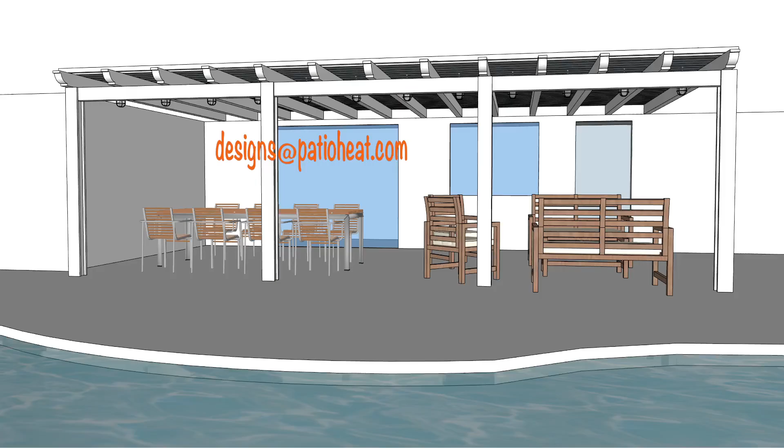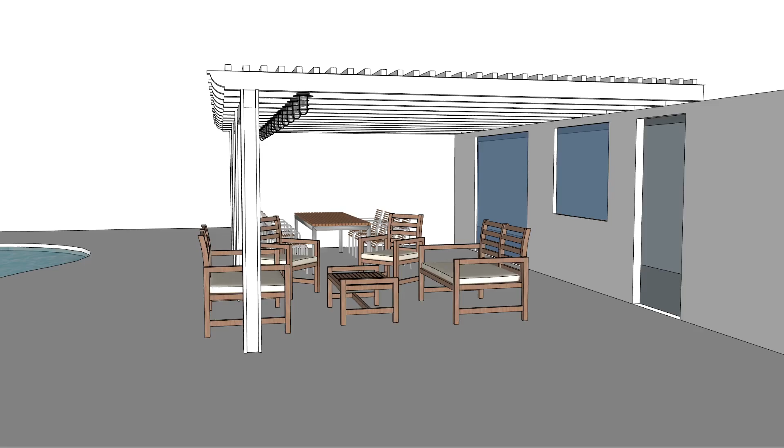All right, so let's go ahead and take a look at this covered patio area here. I'm going to go first into the overall dimensions that I have here. So the overall dimensions I have from the outside edge of this post to the structure over here, I have at 15 foot 1 inch.

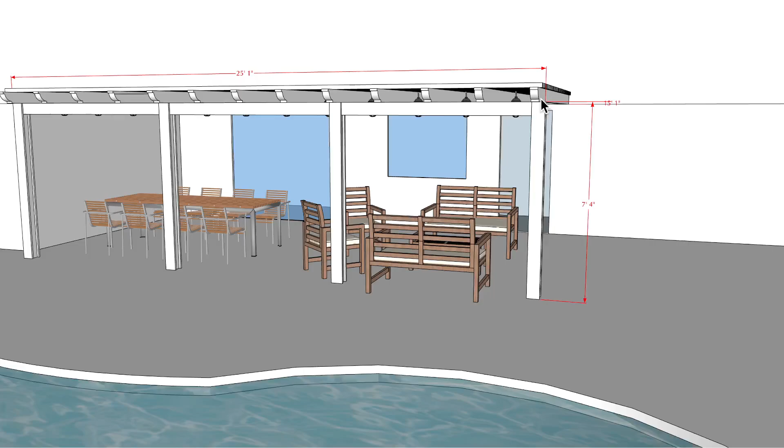And then from this distance over here, from the post to the post over here, I have at 25 foot 1. And then I have a height of the bottom of these beams going across here. I have a total bottom height of that at 7 feet 4 inches off the finished floor. You can see there's some light fixtures.

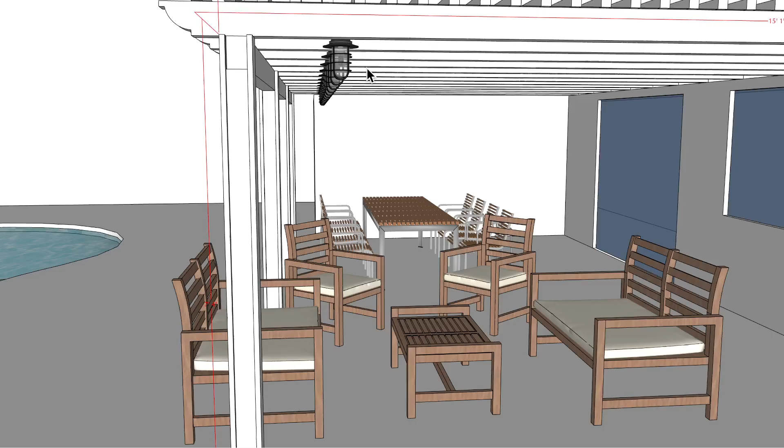These may have to be moved. I'm not exactly sure where they are, specifically as far as how far back and what position they are, but in any case, I just want to let you know that I do see them, and that that might be something that we have to be concerned about. Go ahead and turn off those dimensions for right now, and then I believe I got some information about the distance between these beams right here.

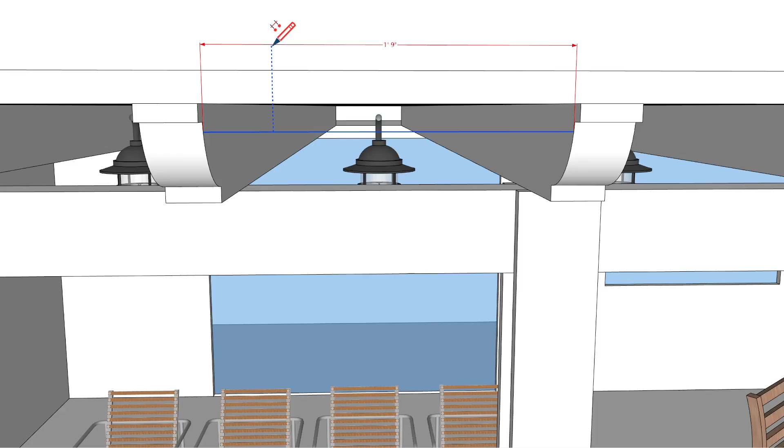So you can see here I have that at 1 foot 9 inches, and so that's from the inside edge to the inside edge. Go ahead and turn that off, and then I think that's pretty much about it.

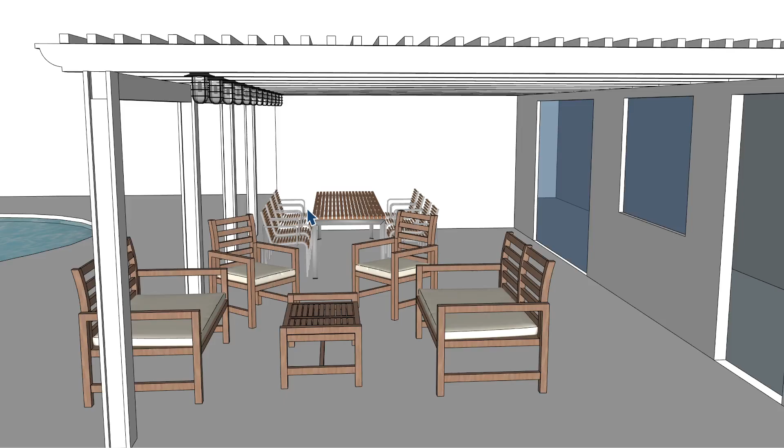Now, looking at the images that I received, it kind of appeared as if the seating positions are pushed off a little bit to the left here, or the outside edge of the patio deck, and I'm only assuming that because of the fact that there is a doorway over here, a sliding door over here, and that's an entry exit point. So I'm assuming that that's not somewhere that you're going to put the seating positions in.

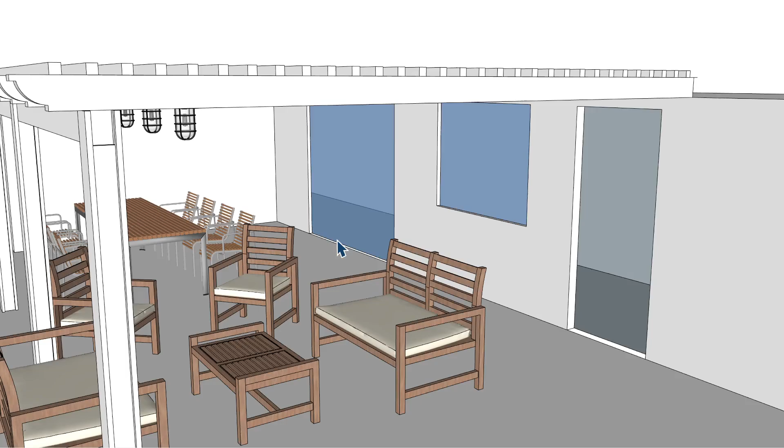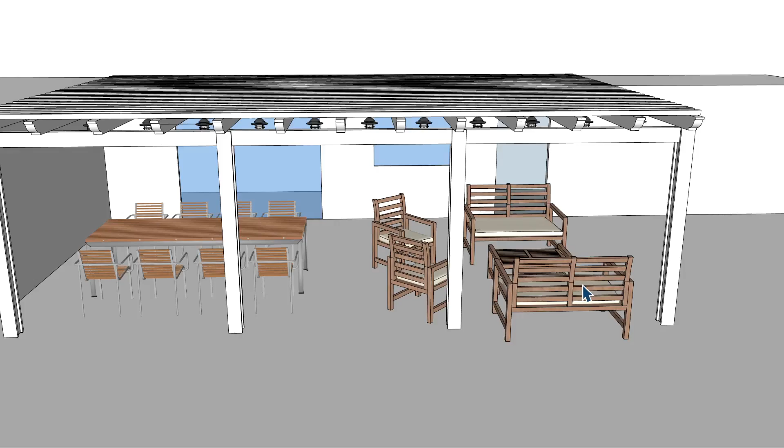Not sure if this door comes out or is pushed in, but let's just go ahead and take note that there is a door over here. That's about it as far as the positions concerned that I see. I'm not quite sure of how many chairs are over here and how far out it goes, but this is kind of what I'm just showing for this particular application.

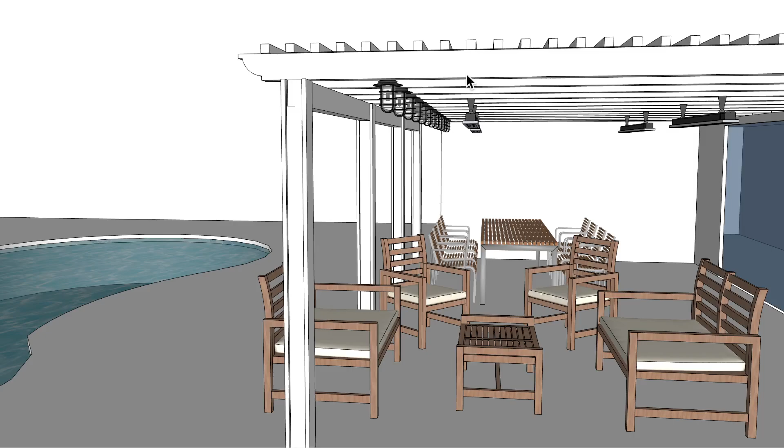All right, so first of all, let's go ahead and look at what models we might put in here. These are slimline units, and the slimline units I have, these are 3,000 watt units. I have them placed at the bottom edge of this beam here and pointed straight down. And then as far as the position's concerned, let's go ahead and draw up that distance.

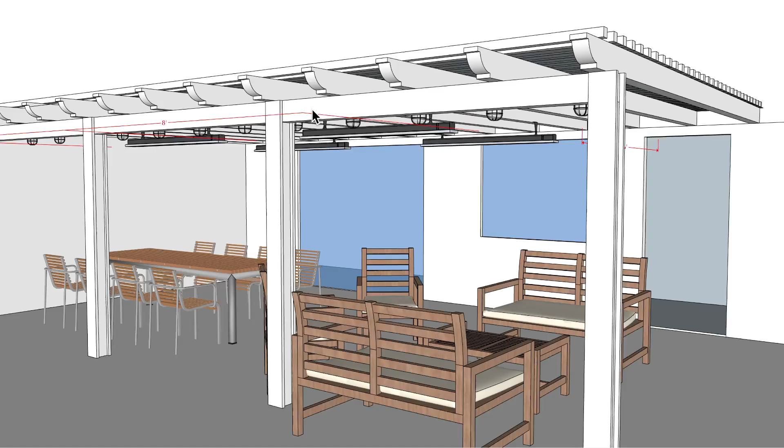So from this center point here—actually this is for a different drawing here, and I'll show you that in a minute. So let's go ahead and take a look at this here. We'll go from the center point here to this edge of the beam itself, and I think the best way of grabbing that would be something like this, and we'll go straight down here.

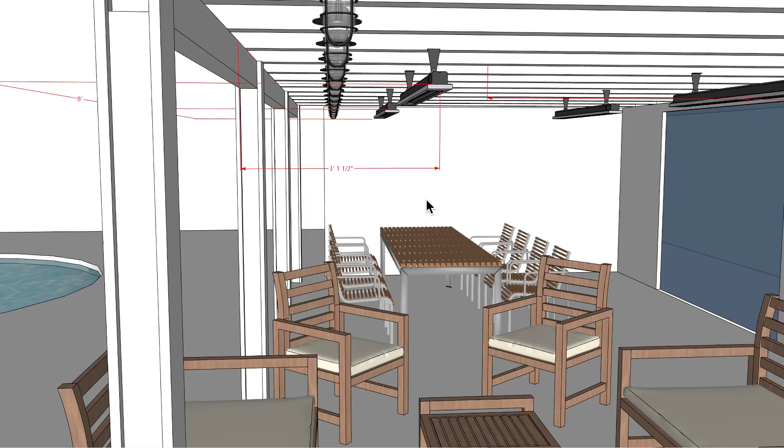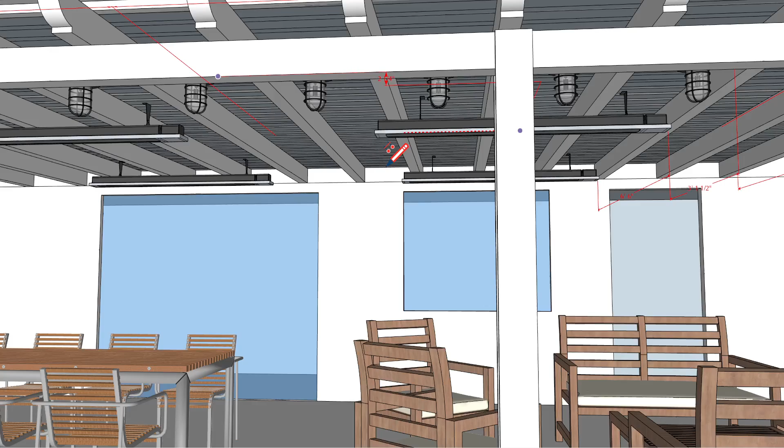So you can see the center point I have at 3 foot 1 1/2 of an inch, and then from that center point to the other two heaters, I have that at 6 foot 6. And then from, we'll call this the center of the patio structure, I have that these two heaters to the center point here, I have that 4 foot 6. So that would be a total of 8 foot center to center on the units themselves. 9 foot center to center on the units themselves.

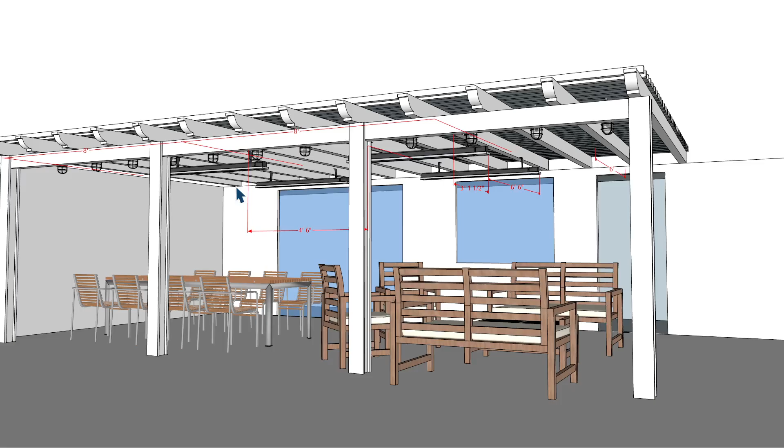And yeah, let's go ahead now. So these are 3,000 watt units pointed straight down to the ground. And again, you can see that I have these offset so that we're not as close here as we are over here to the center point of the heater itself.

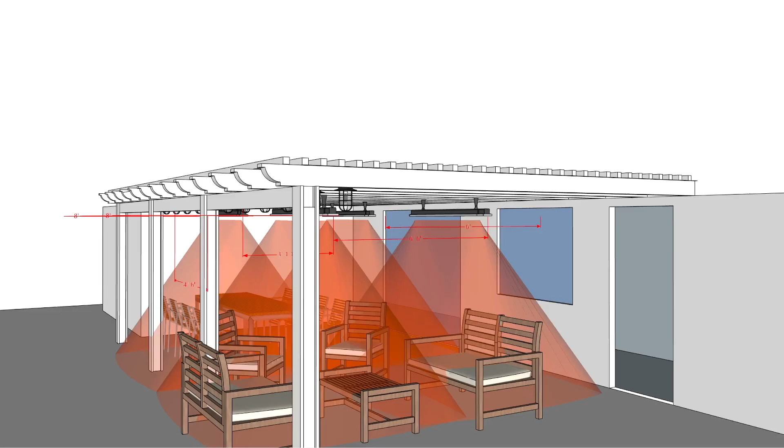Let's go ahead and look at the array itself. You can see that it's covering the patio fairly decently, except that we're not hitting the entire space here on the left side, nor on the right side over here.

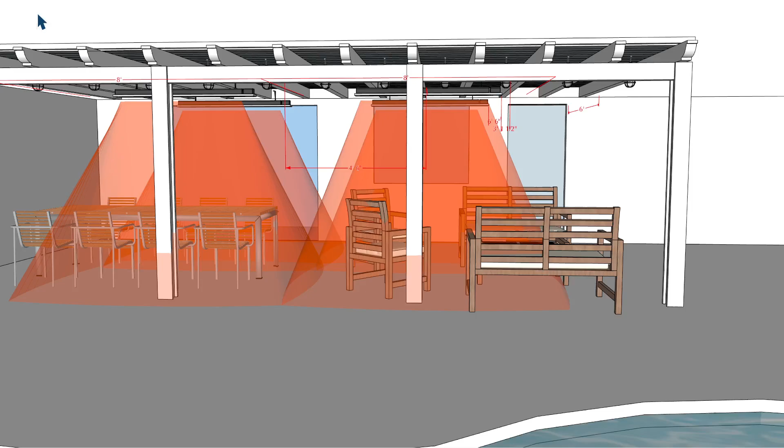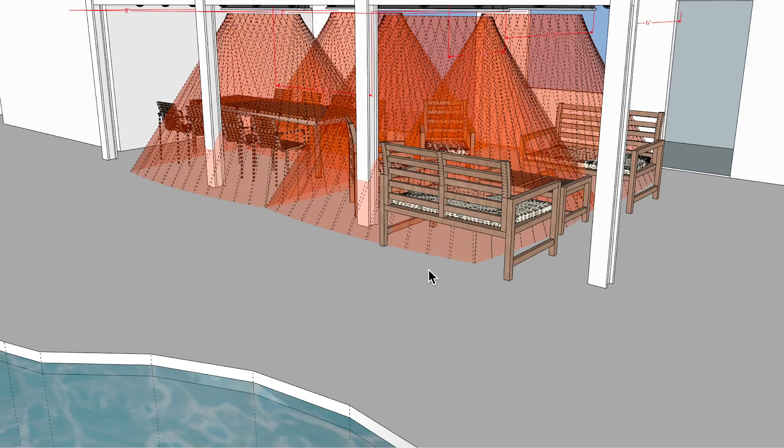So the total distance you're going to really get, let's try this real quick and pull up another distance of throw here. So this is roughly what the throw will be. Now the difference between throws on these units has something to do with the height. This is an 18-foot throw from left to right here, but it'll have something to do with the height of the heater itself.

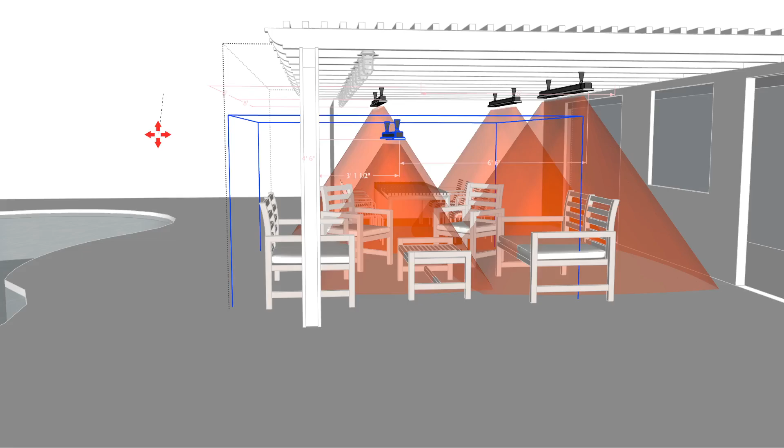The closer to the ground the heater is—if I just took this heater for instance and pulled it down slightly, let's try this here—you can see that down below where the ray is hitting the ground, it gets smaller and smaller, because this is a light source. Infrared light is invisible to the human eye, but it is a light source, and as it goes down closer and closer to an object, it gets tighter and tighter. It also gets hotter and hotter.

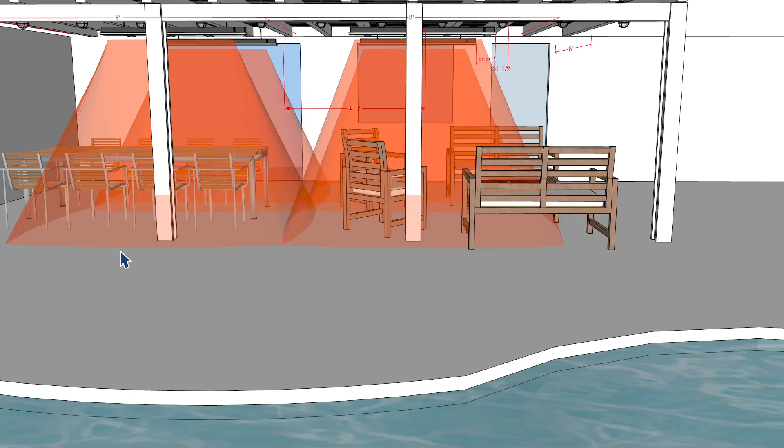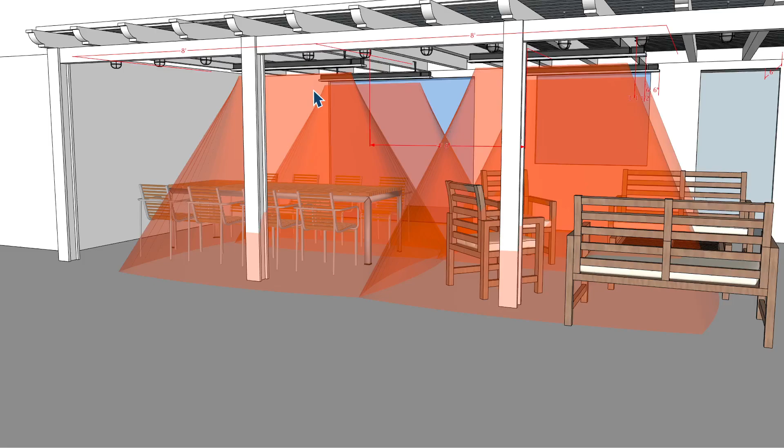So that's what will dictate the distance across and how much heat source you'll get. The lower it goes, the less intense of a unit you would be looking for. You could go with a 4,000 watt unit on these applications I'm showing. However, you'd probably want a control system so that on cooler days you can have more intense heat, but on a warmer day you can turn that intensity down so you're more comfortable depending on the temperature.

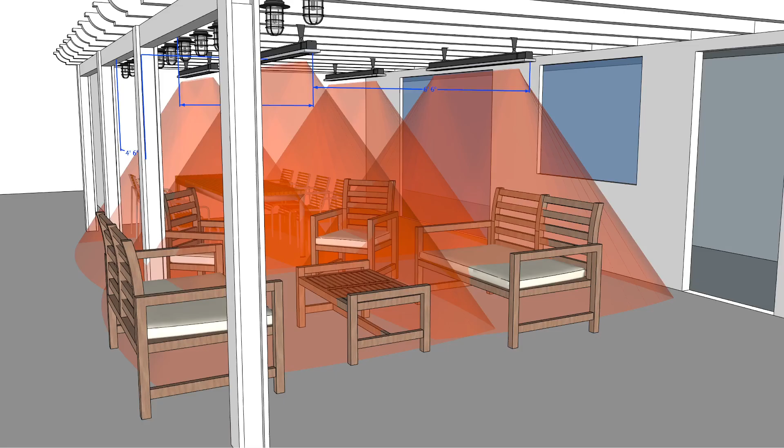Let's go ahead and turn off these distances here, give me one second, I'm just going to change some of these here. All right, so that is 4 of the 4,000 watt units with control systems.

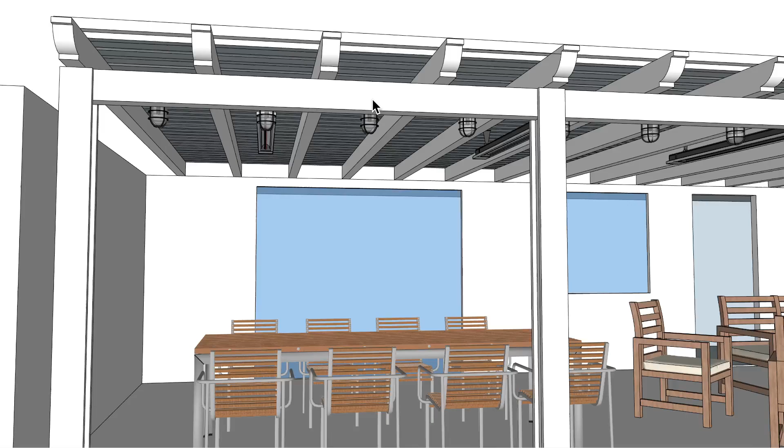Let's look at a different option. A different option would be something like this, where we are placing the units between these rafter beams. You can see here I have 4 units, and I would probably go with a 4,000 watt unit on these because they're approximately 6 inches higher—about 7.5 inches is the height of these rafters or beams.

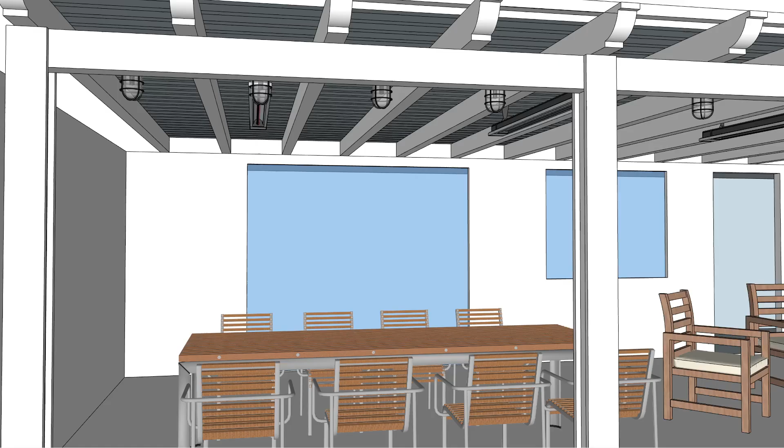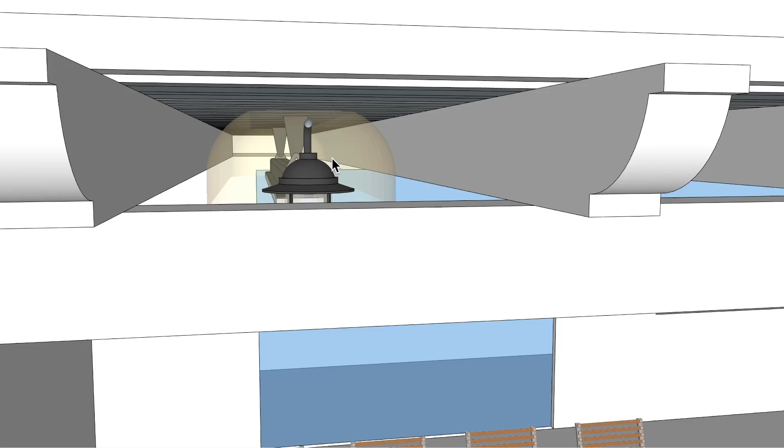But in any case, we want to make sure we are meeting the clearances above the heater. In this particular case, the unit itself is 5 inches wide, and then we have the clearance at 6 inches on all 4 sides basically. So we need to make sure we have that total clearance for the unit itself hanging down from the top here, and that should be no issue with regards to all 4 units like this.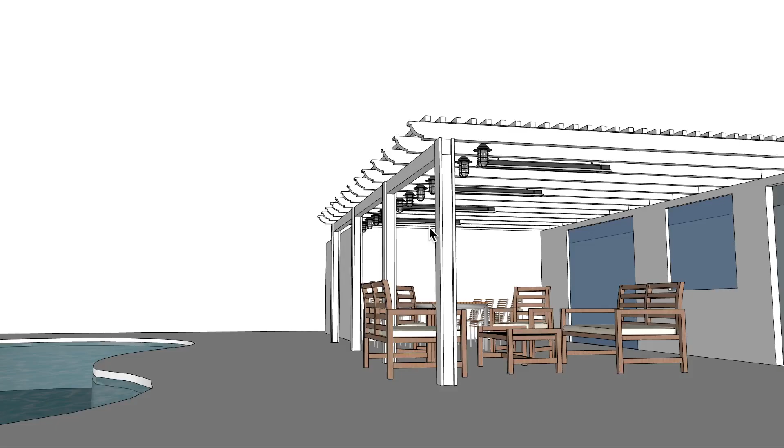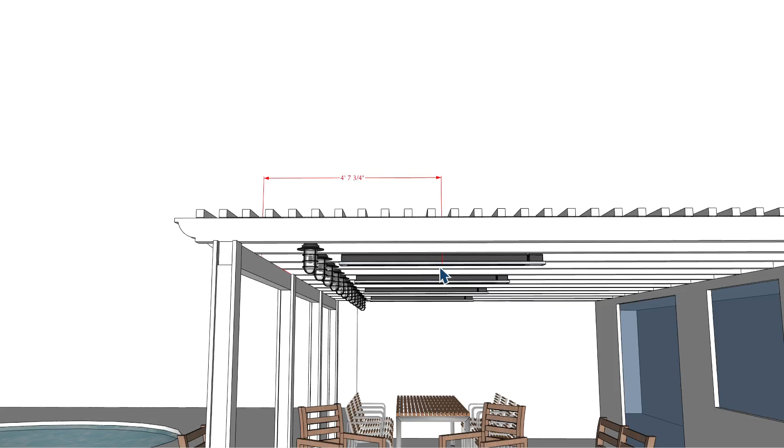Let's turn that off and look at the footprint of heat. Although you can see I've off-centered these units, and if we go from this point here in the center to this point here, I'll look at what that is. We have 4 feet 7 and 3/4 inches to the center point of the heater itself. I'm going to turn that off and look at the footprint of heat.

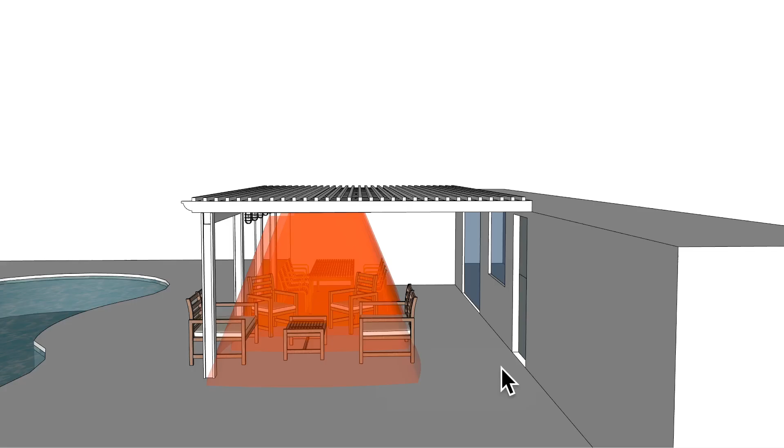You can see here that our coverage is fairly decent. Again, we're getting more of the total length going left to right here, but we're still not covering about 5.5 feet in this direction over here. So this position and this position are kind of in that realm of whether we're going to cover that space well or not, and I would have to say this space is not covered, and this space would be okay.

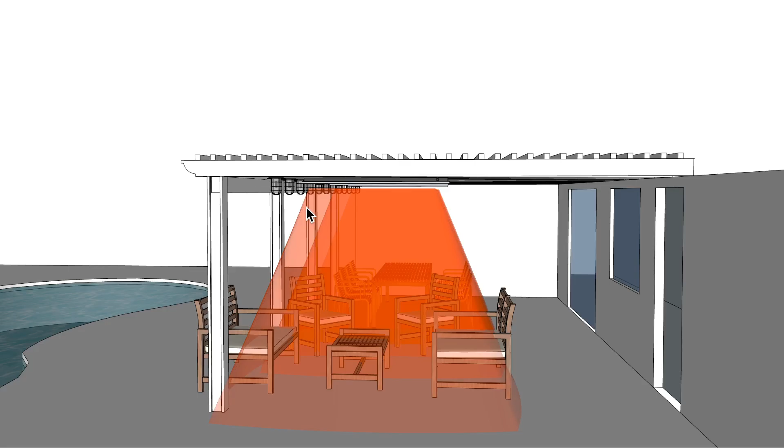It's kind of like on a sunny day, let's say you were standing here in the sunlight itself, you would feel the warmth of the sun. The air temperature all around has not changed. So the air temperature, let's just say, is 65 degrees, something in that nature. And then you feel the warmth of the sun standing right here.

And then you walk over here into the shadow. All of a sudden you feel the difference of no intensity of the sunlight ray, the infrared portion of the sunlight ray penetrating your body, so you don't feel as warm as you would over here.

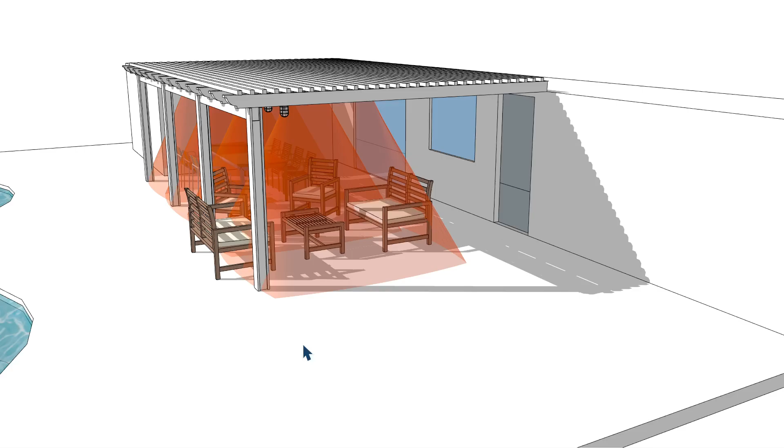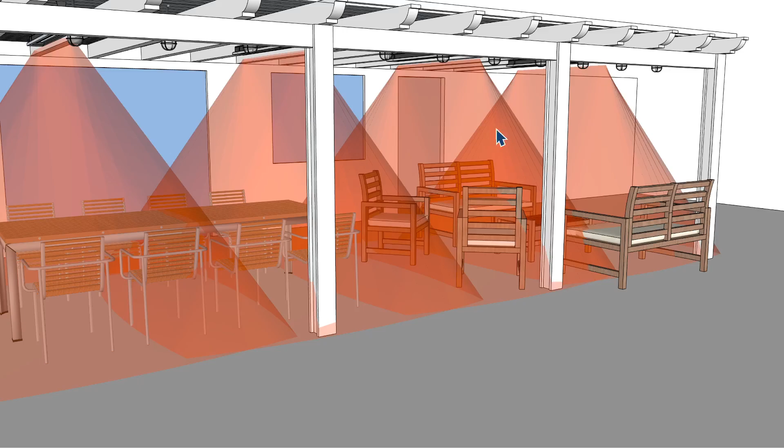Well, the same is true with the infrared light wave heaters. These are Infratech Slimline 4000 watts. If you're not in the ray, you're not going to feel the warmth of the light itself. Again, infrared is invisible to the human eye, so you won't physically or visually see these rays coming down. It will be more like this, but you will feel it.

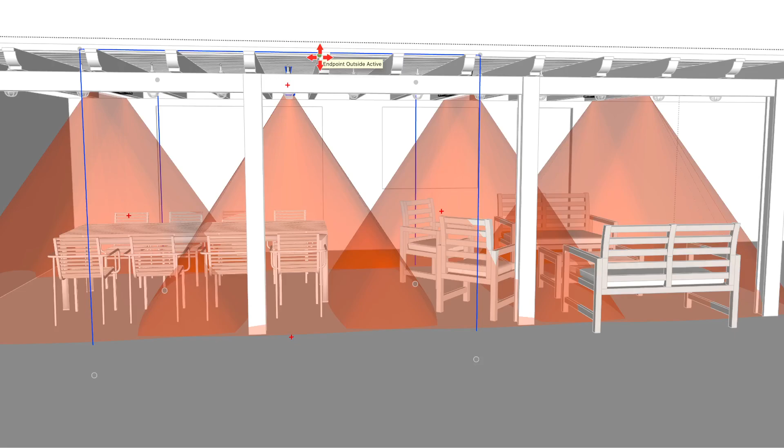So this might be a good application here. I know this particular customer had mentioned possibly only using 3 units. So if we took this unit here and just moved it a little bit further over, and then we did the same with this here.

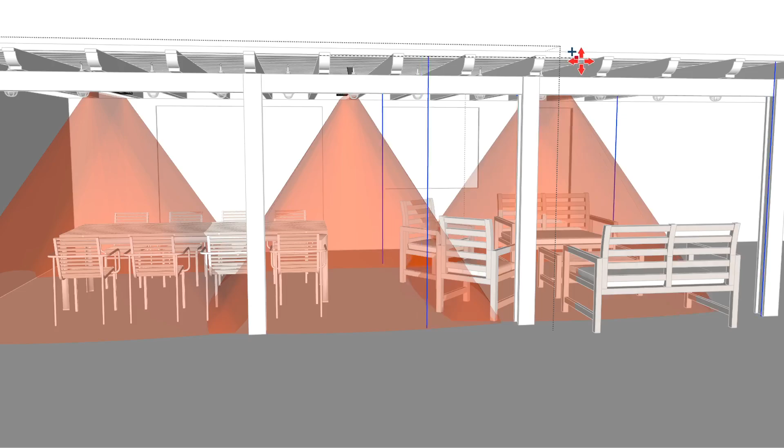We took this and moved it, let's say, over to approximately over here. You can see the coverage is still decent. However, we're missing these locations over here and over here. So that's why I didn't choose that to begin with.

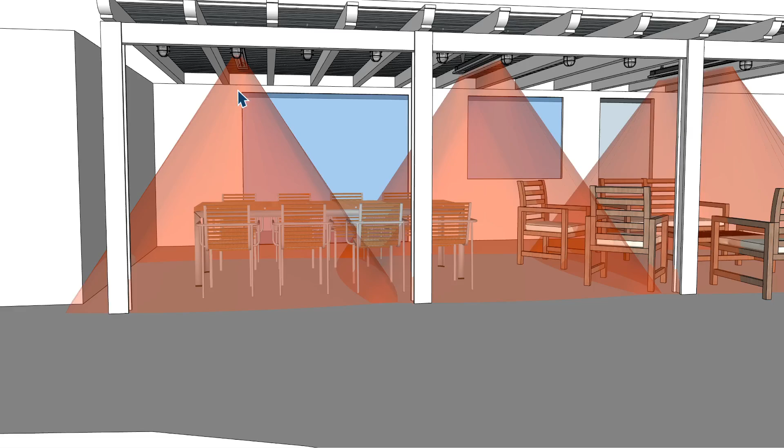And also, this being the center point of the patio, it would have to be off-centered in order for it to fit between the beams going across. So that's why I kind of like the idea I showed earlier with the heaters in this fashion.

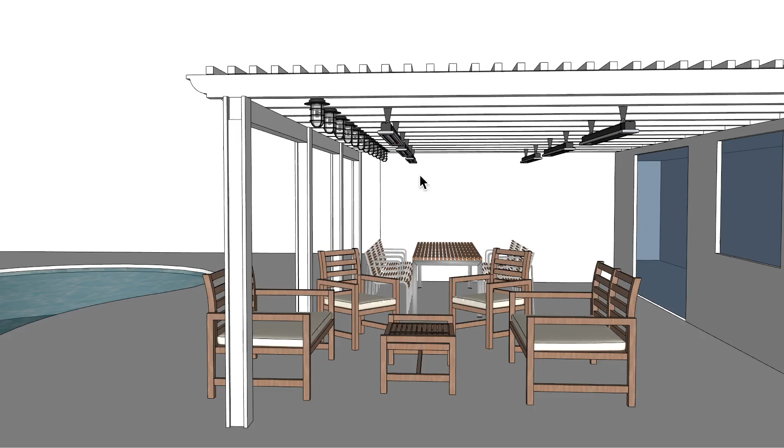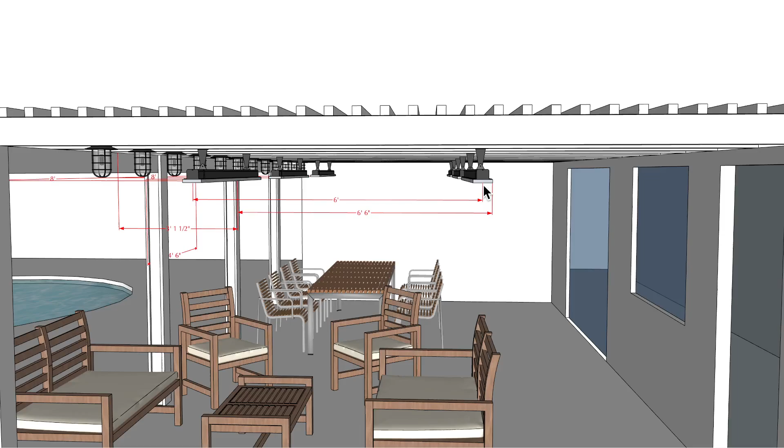All right, and we'll go ahead and look at the final possibility, which is having 6 units going down this same distance here. Let's get this up, and you can see 3 feet 1 1/2 inch to the center point to this edge over here, 6 feet 6 inches to 6 feet center. I probably didn't move the other one around like I wanted to, so it should probably be 6 foot center to center on the other batch of 4, I believe.

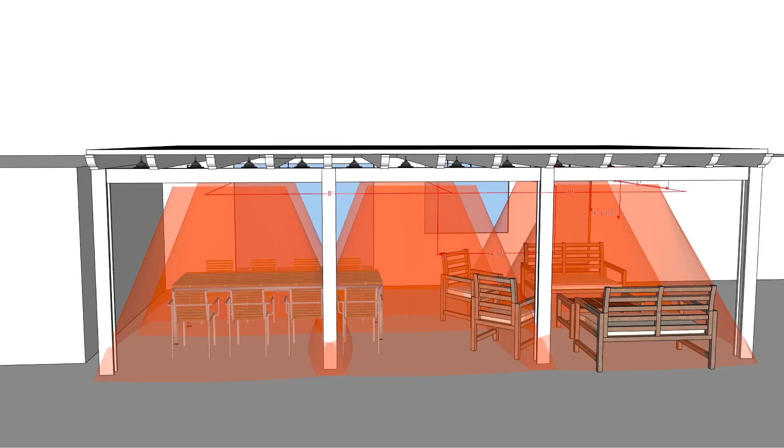But here you can see that this is going to be probably the best application of them all, where you're getting full coverage of nearly the entire patio, with the exception of this position over here.

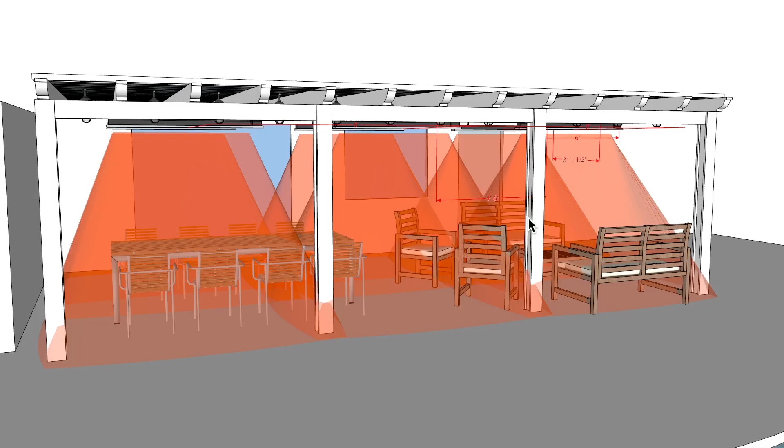And again, because of the height of the application as well as the distance apart, you'd probably be able to go with a 3000 watt unit. But a 4000 watt unit with a control panel would be the most optimal type of application. It depends on what your budget is, and whether you're looking to have those kinds of controls available.

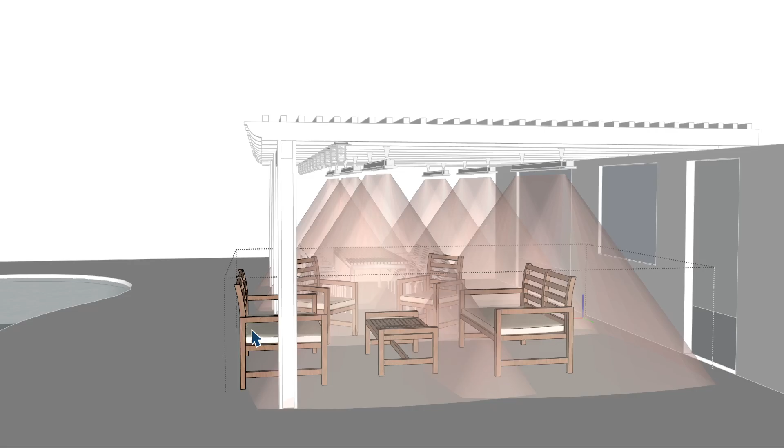So also, just to look here, we're still not hitting this particular seat right here, but let's just say on those cooler days, you just take the 3 seat positions and table and move it in, and now you're in that warmth.